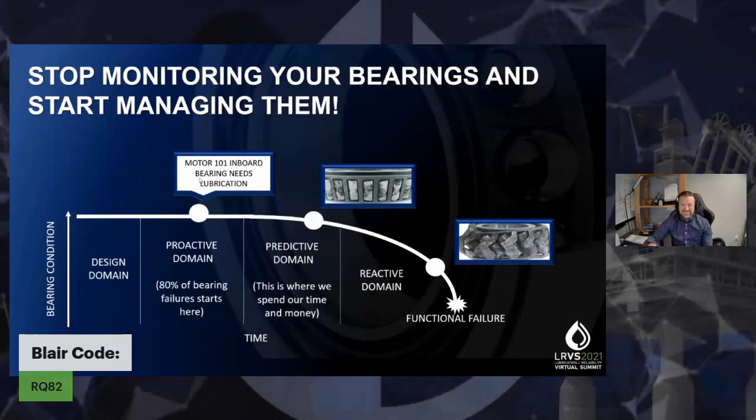What I'm going to talk to you about is re-looking at the way we do re-greasing of bearings and how we can leverage more technology to make that process more efficient. I'm pretty active in the IoT space, and I try to have conversations with people in panel discussions. I fully agree that people are the most important part, and technology can help fuel people to make better informed decisions.

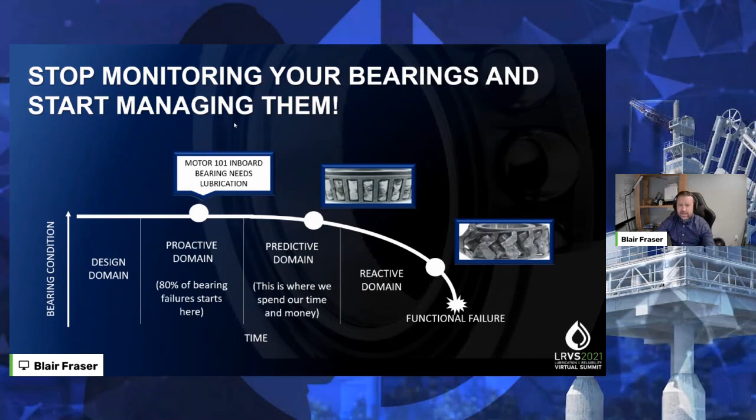What I'm seeing in technology in general is that we're doing a lot of work to identify a failure in a bearing. It's what I call a race to identify the failure. I believe that if we just spend a little more time on the proactive part of eliminating failures, everyone agrees it makes so much sense to eliminate that failure from happening in the first place.

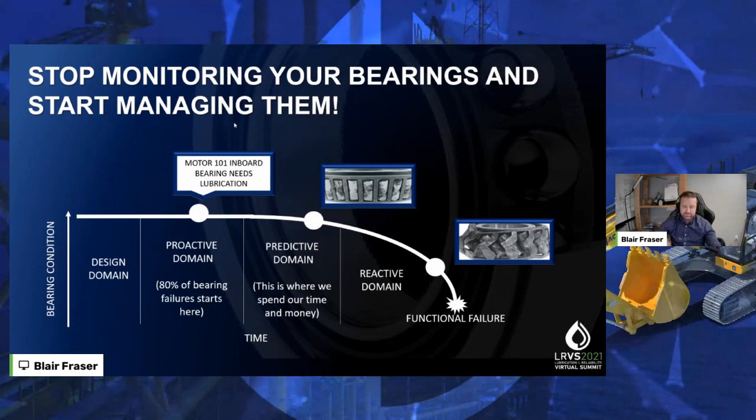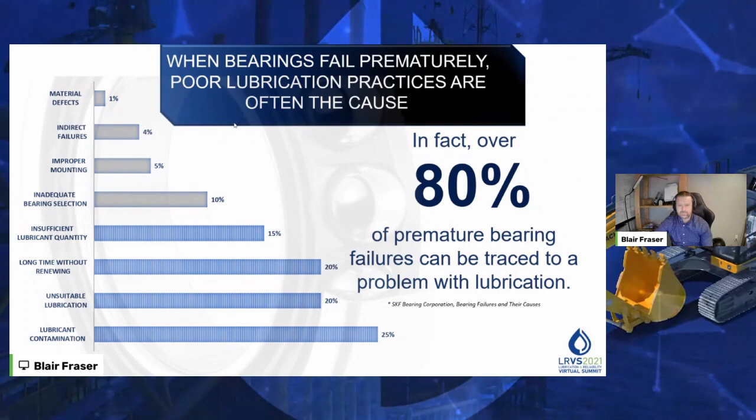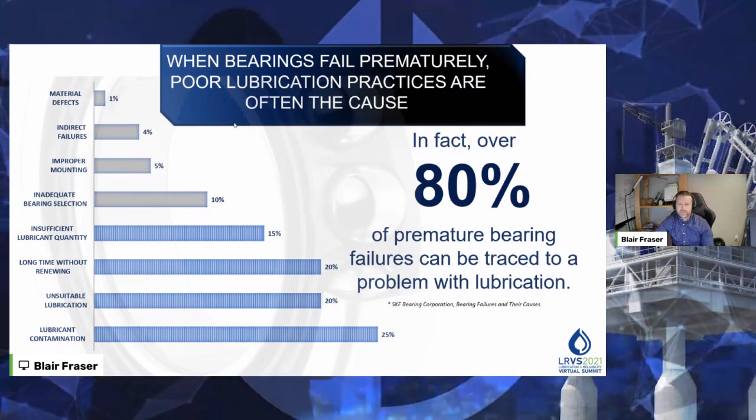There's lots of studies, and it should be no surprise to anyone in this community that, whether it's 80% or 60% depending on the study, the primary cause of premature bearing failure can be traced back to a problem with lubrication. And it's not just over or under lubrication, and it's not just contamination, there are other aspects to that. So when we're looking at reimagining bearing lubrication, the question is how do we address and try to eliminate the causes that can be traced back to a problem with lubrication.

And I think that's really where technology can start to come in. Those repetitive non-value-added tasks are what we need to focus technology on, and really focus the humans, the people, on enabling those value-added tasks.

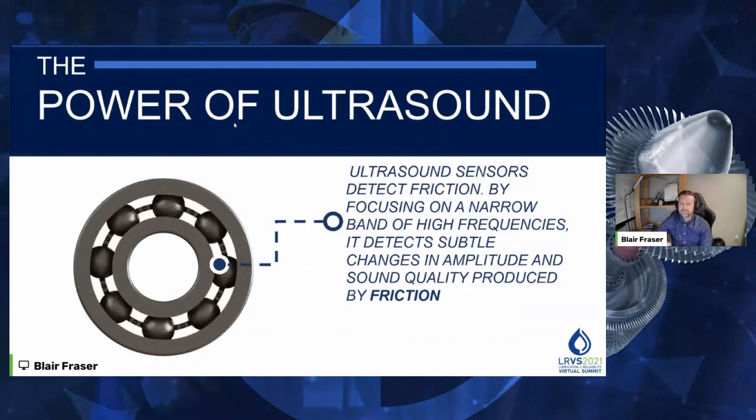So some of you might be familiar with ultrasound, and I'll give you a quick overview of what ultrasound is. Essentially, we're measuring high frequency noise, way higher than we can hear with our ears, and essentially what it correlates to is the sound produced by friction, the friction happening in a bearing. So then it becomes kind of obvious why ultrasound might be a really good fit for you in your condition monitoring program to look at the health and lubrication needs of your bearings.

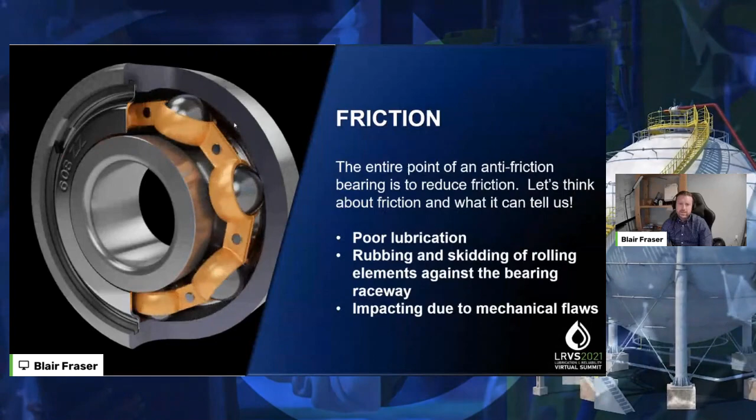So when we look at friction as a whole, it can tell us a lot, and we start to focus on things about condition monitoring, condition-based maintenance, whatever you want to call it, predictive maintenance, although it's not typically too predictive at all. But if I use the word condition-based maintenance or condition-based monitoring, what's the condition of the bearing we're trying to monitor? What's that one variable? Friction can tell us a lot if we track it properly. It can tell us about poor lubrication.

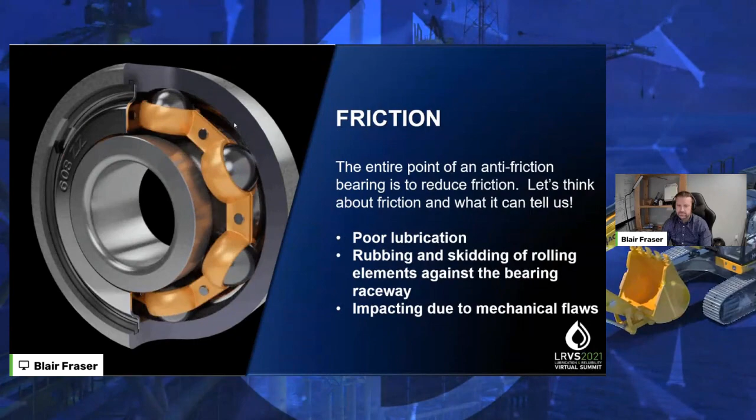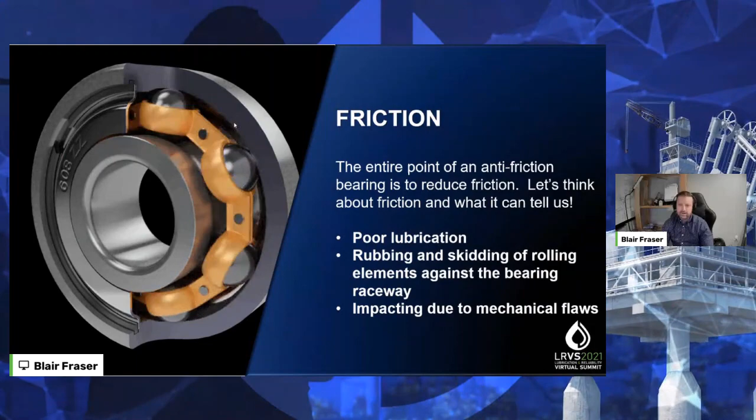The purpose of lubrication, of grease in a rolling element bearing, is reduce friction - that's the primary function, among other things like corrosion protection. In fact, it's in the name: a rolling element bearing is an anti-friction bearing. It can also tell us if it's impacting and things like that.

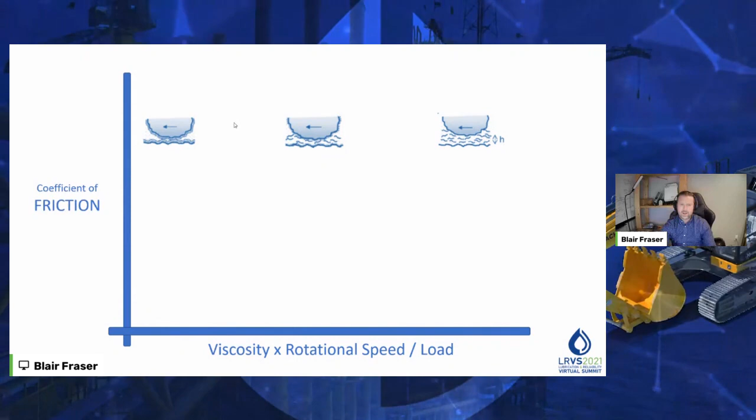So when we look at this as a whole - and some of you might be familiar with this, and do a lot better justice than I'll do - we look at what's called the Stribeck curve. And for any tribologists who want to add comments, feel free. When we look at friction compared to viscosity times rotation speed over load, essentially the operating context of that bearing, the first regime they talk about is boundary.

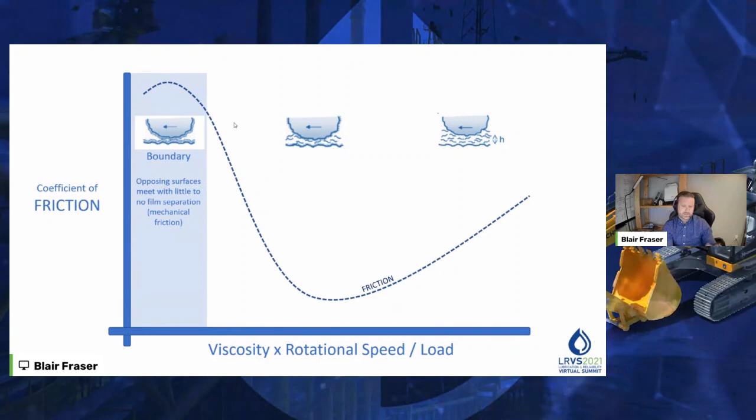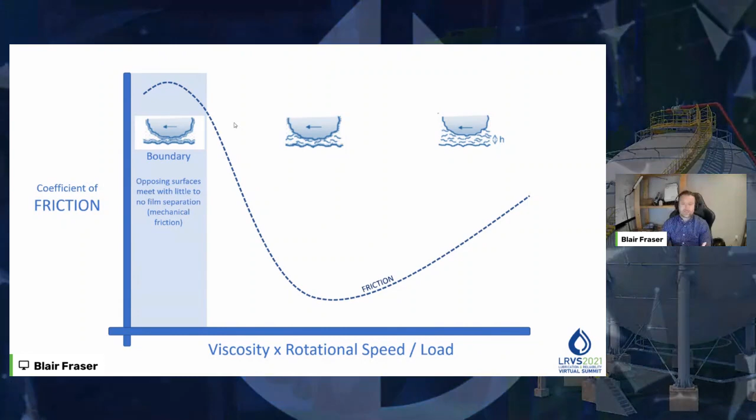When you have essentially no film separation, there's metal to metal contact, right? And obviously metal to metal contact is going to give us the highest level of friction, or in our world of ultrasound, the highest level of decibels.

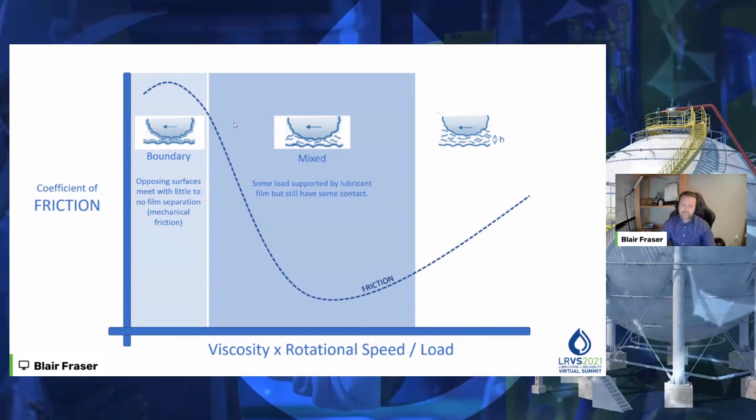We get into the next category, which is the mixed regime, and this is ideally where we want to be. Some load is supported by the lubricant film, but still have some contact - that very thin film. I've heard so many grease specialists tell me the exact number, and I always forget how many microns thick that grease needs to be, given it's the right grease, contaminant free, to actually support that ideal level.

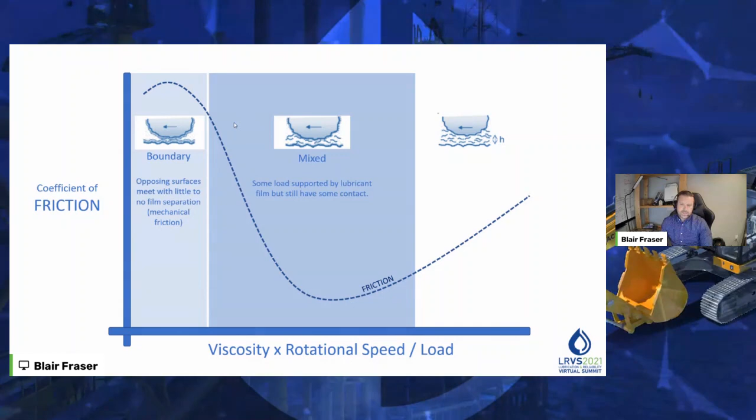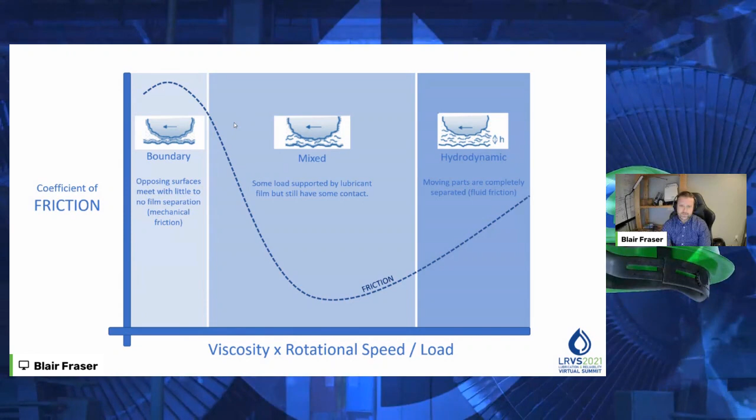And then if we move out of that, we get into the hydrodynamic, which is almost counterintuitive in my world - I come from the electrical space - was hydrodynamic, when there's actually so much grease in there we have opposing directions of fluid. We've all seen that when we've greased a bearing too much - what starts to happen? The friction starts to increase, it starts to heat up and things like that.

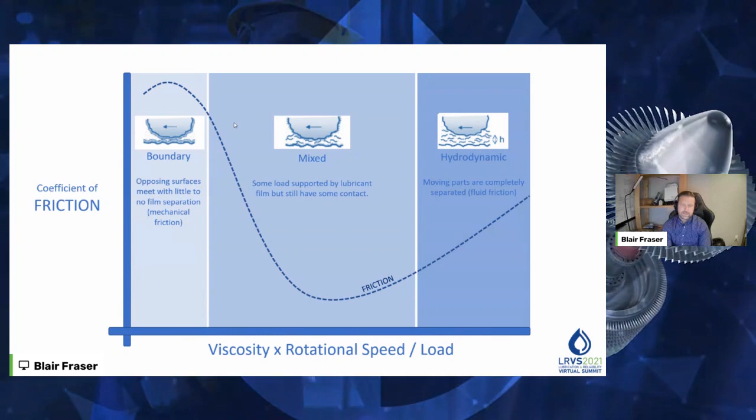So knowing where you are on the Stribeck curve can greatly impact the life of that bearing. But typically we don't look at it this way, right? We look at other means of measuring that bearing in terms of velocity, movement, and things like that.

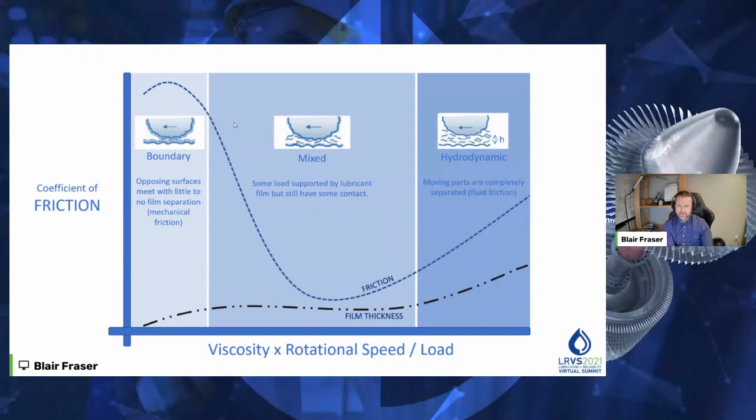So when we look at that film thickness, there is an ideal location. In fact, what I've learned is that you don't want to be at that bottom of the curve, the lowest point of friction, because it doesn't leave much room for error. In fact, where I have that word friction is ideally where you want to be on this Stribeck curve.

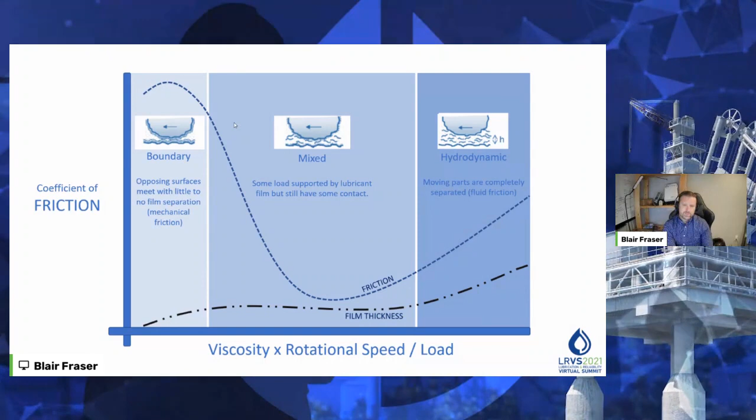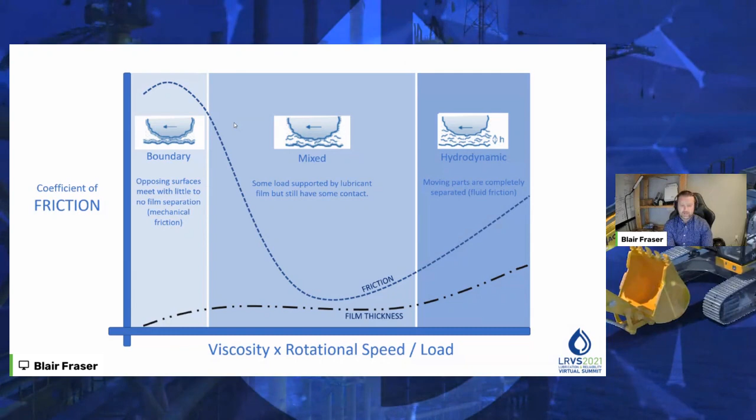You want to be in between - you still want to be in the mixed regime, as they call it, but you don't want to go back toward the boundary of mechanical contact, because that's where a lot of damage occurs. So knowing where you are in the Stribeck curve can truly reimagine how you look at bearing lubrication.

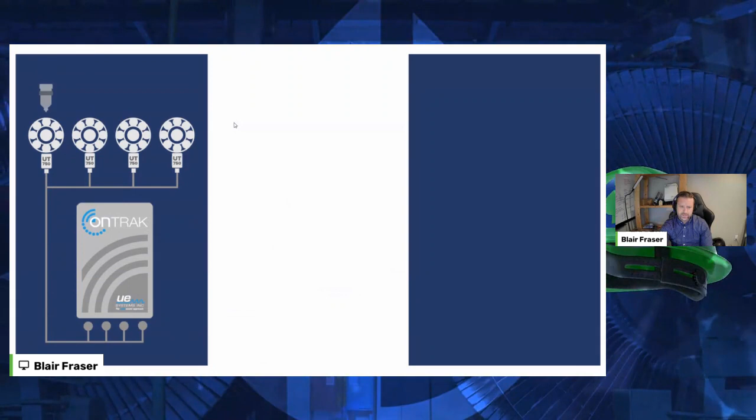So what we developed was a system that, through our sensors and ultrasound, is going to measure that friction in real time. So consider it, you're building a trend of that Stribeck curve of what's the friction over that bearing in real time, and that information is getting sent out.

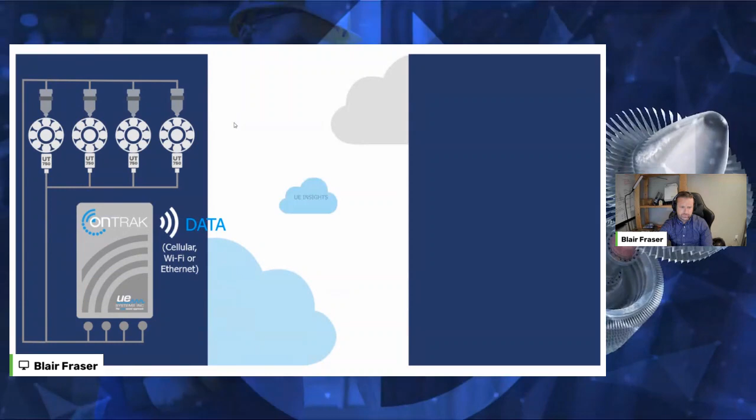And this is about reinventing or re-looking at those non-value added tasks. So you're measuring that friction 24/7 through all operating contexts - when it's off, when it's on, variable speed, different temperatures, all that kind of stuff - to get insights into that friction.

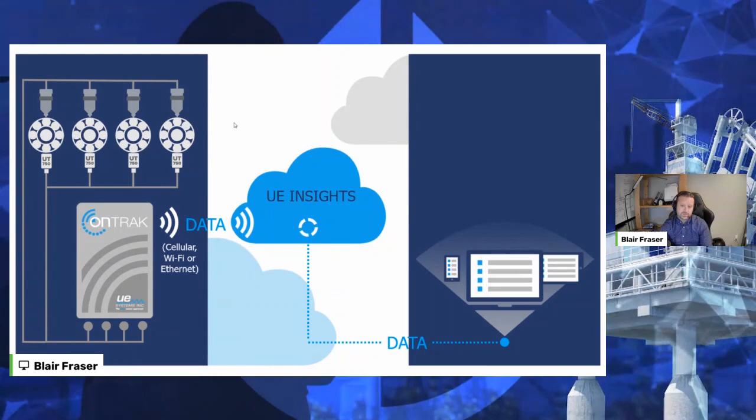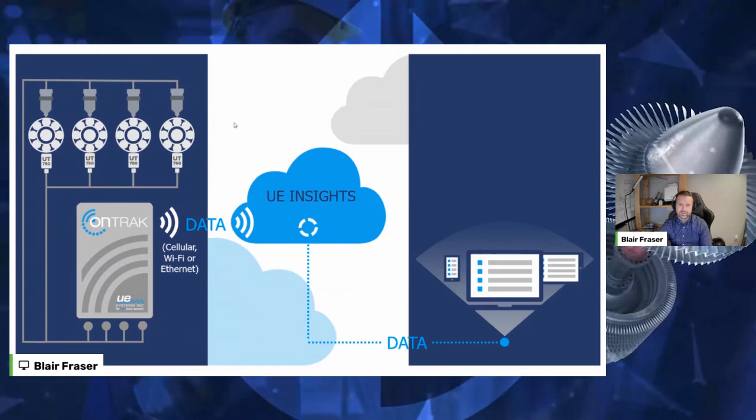And what we can start to do is look at that friction and start to identify certain insights. Those insights traditionally are: when does a bearing require lubrication based on friction, how much lubrication is required based on friction, and then if I enter a failure mode beyond friction, how quickly am I starting to fail? Those questions can be answered by trending this friction in real time.

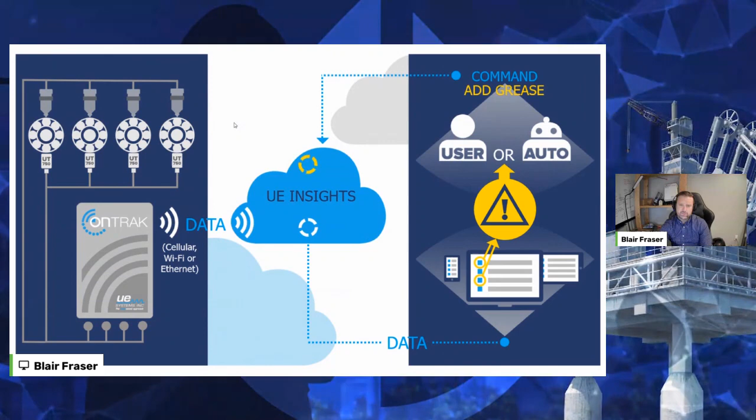So what we allow is the user, in fully automatic mode, to go out there and, using friction as its guide, know exactly where it is on that Stribeck curve, and very strategically and very slowly add the right grease to that bearing to restore the friction level, right? We have case examples.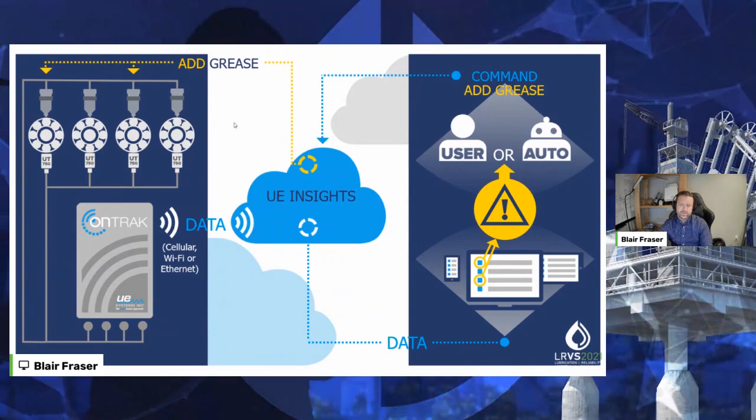I'm going to show you what that data looks like when we're in that far left boundary of the Stribeck curve, when we have metal contact, and see what happens with just a little bit of grease hitting that bearing. And then, of course, if we have over-greasing, what happens with that as well?

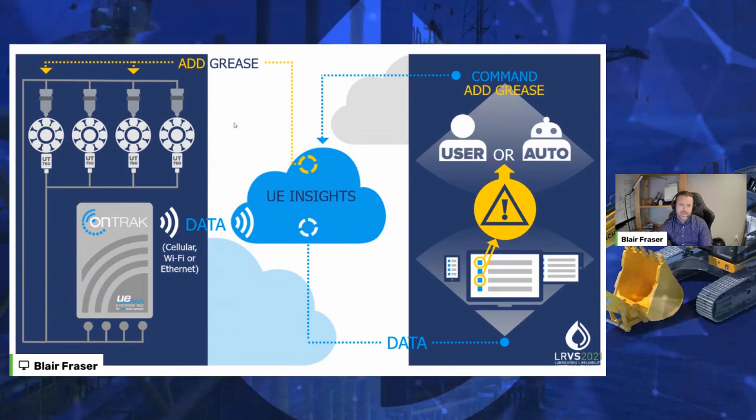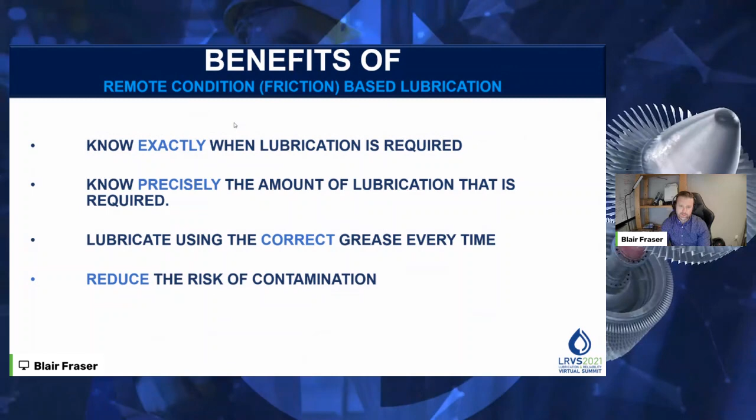So the benefits of remote condition, friction-based lubrication is the feedback. We know exactly when lubrication is required and precisely how much is required. If we do this right and load the single point lubricators, which traditionally have no feedback and no status of how much grease is left, we know with confidence we're using the correct grease every time, that grease is hitting the bearing, and that remote grease lines aren't plugged. And of course, we reduce the risk of contamination because we're not walking up to it on a time-based schedule.

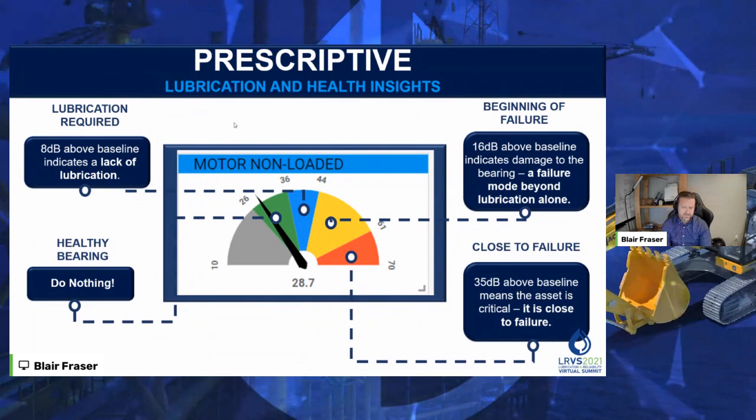The way we look at it from a friction or ultrasound point of view is very simplistic. I know there's a lot of talk, and I'm a big supporter of artificial intelligence and machine learning, but it's very important to only apply it when it can drive additional insights.

One thing we talk about with ultrasound is its simplicity. It's not simple in how it gets the data, but it's very simple in how you can start to use the data. And what we do is set up a traditional dashboard like this.

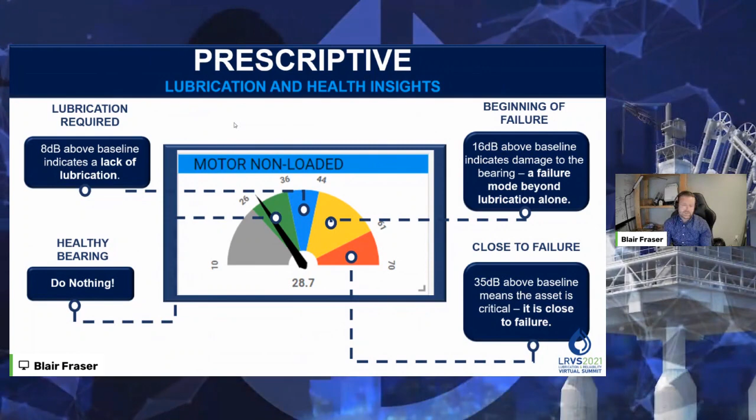What we do is set a baseline. It's very common to use an 8 decibel level over baseline, which is an ISO standard regardless of the bearing. I can go into more detail, or we can chat separately about how to set that baseline, because each bearing and application will have somewhat of a different baseline. So if there's an increase of friction 8 decibels above the baseline of a healthy, well-lubricated bearing, it needs lubrication.

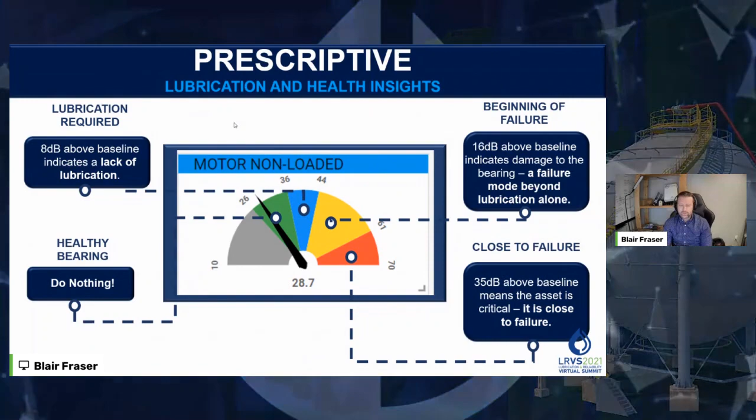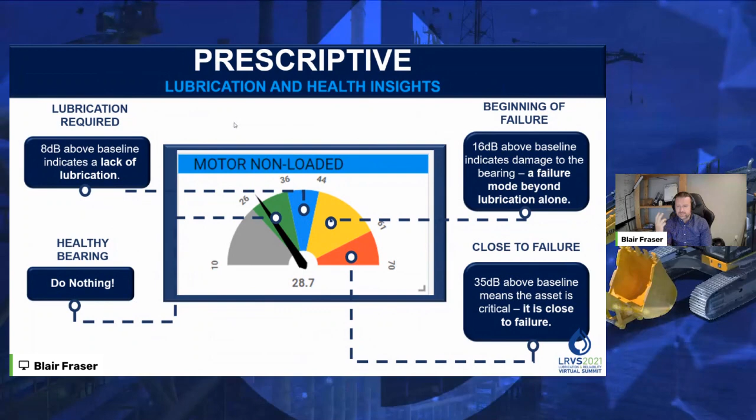If it's 16 decibels above, we're going beyond a lubrication failure mode, which I'll show you some examples of. When you lubricate, you can mask a failure with grease - we actually see that friction go down, but it's not going to stay down. Think about an inner race defect, an outer race defect, a cage failure - eventually that defect is going to find its way through, and you will start to see that friction go up. I have some use cases of that.

And if it's 35 decibels, that machine's walking down the hallway, and you're going to pick it up with other senses and things like that.

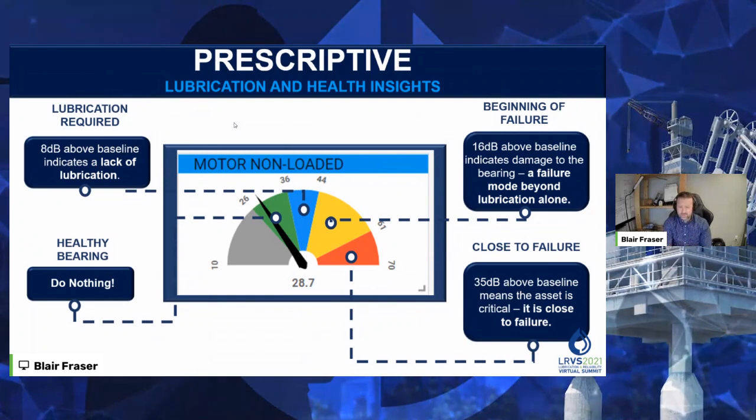So I want you to imagine with me, right now we're reading 28.7 decibels on this screenshot I took. Imagine that arrow was straight up, reading 40 decibels. You walked up with a grease gun, using your cell phone, watching that friction. You squeeze a little bit of grease into that bearing. What's going to happen is, with every squeeze of that grease gun, you're going to start to see the friction start to go down, in real time.

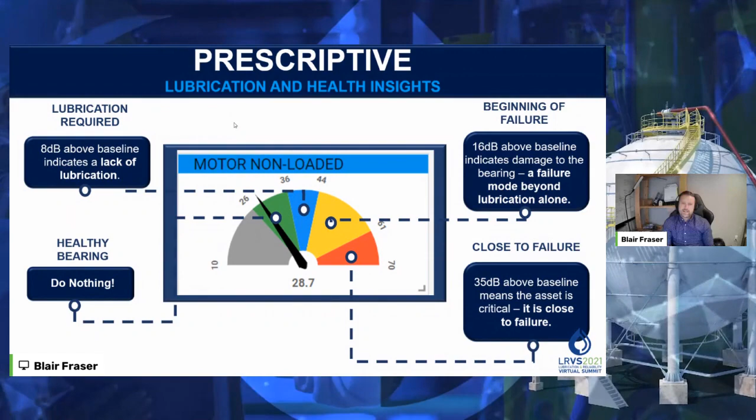And that's really what we've got to think about from reimagining it - we're not just doing it on a time-based schedule, we're doing it on condition feedback. And if we take it a step further, what if you didn't have to squeeze that grease gun? What if it could do it for you?

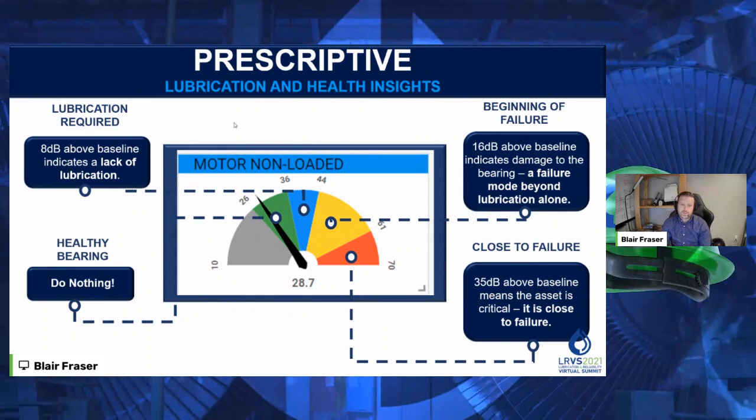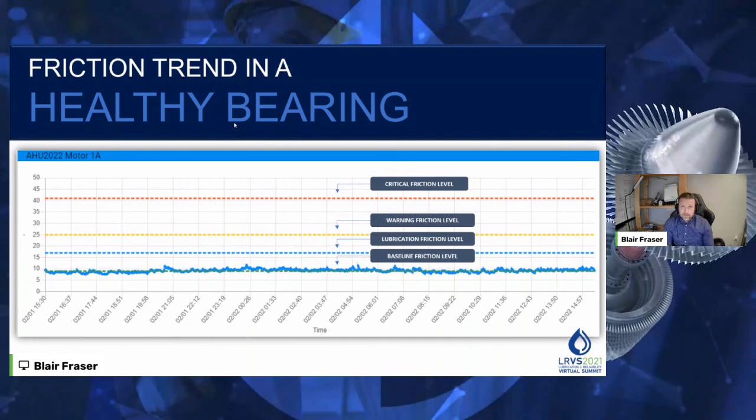So the question is, does load, operational context, or speed change friction? Yes, it does, and let me describe what it does on a healthy, well-lubricated bearing. This is another way of visualizing this - you can see this friction trend if you were to plot 24 hours, 3 days, 3 years, or however much time you want.

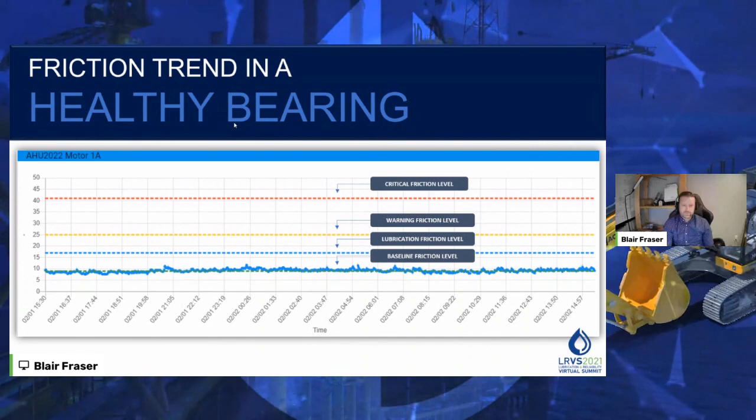This is ideally what you want to see. There's a green line underneath there - that is our baseline. That blue dotted line is the lubrication level. When it needs lubrication, our blue trend line of friction will actually increase. Over top of that blue line, we lubricate.

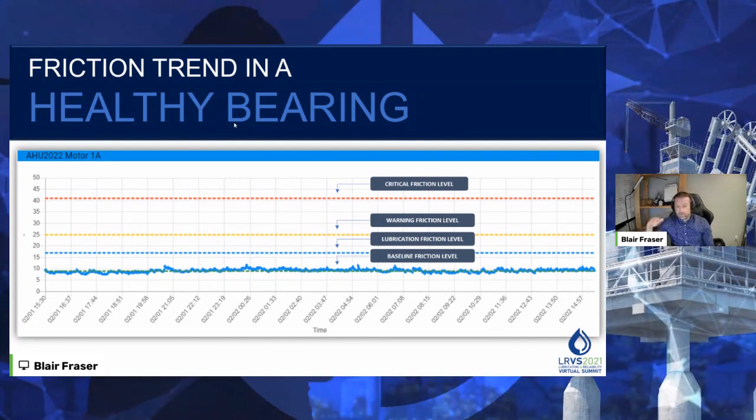It comes back down again. Of course, yellow is warning, and red is critical.

So let me answer the question: does friction change based on varying speed conditions? It does, absolutely. We've done our own studies, academia has done studies, and our customers have done studies. It's important to note that on a healthy, well-lubricated bearing, the change is very subtle. We may see a slight increase, maybe 2 to 3 decibels. Sometimes it's larger, depending on the operational context, but it's not going to be a night and day difference.

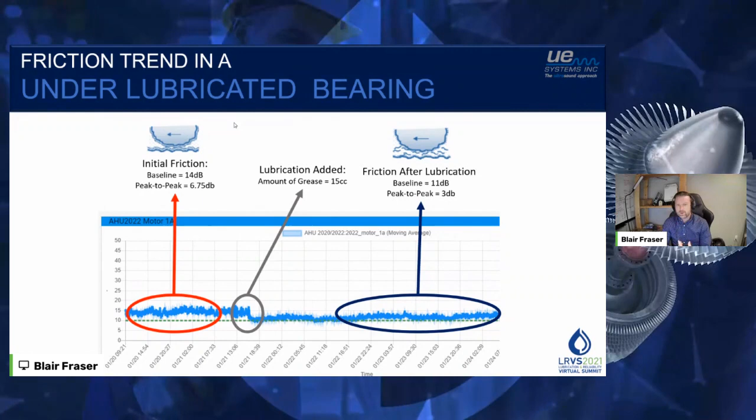So let's take a look at this. Here's an example. You can see the initial friction. The baseline was 14 decibels peak to peak, that's the highest point to the lowest point of the friction trend. Essentially that tells me there's a lot of impacting going on. We see this very commonly with the system because it becomes so easy to maintain your bearings, people will grease even when it's not at the point where you absolutely need to. They just want to watch that friction go, which is fine.

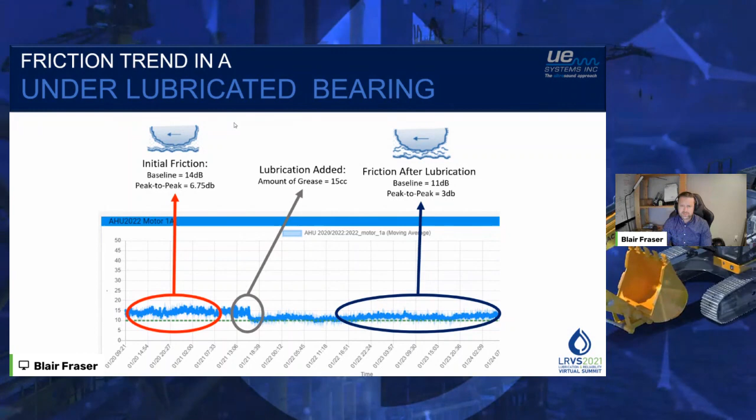So what happened here is 15 cc's of grease was added. You can imagine if you were listening to this, which you can with our ultrasound tools, our handheld tools, you're going to hear a lot of static, a lot of impacting. As soon as that grease is added, nice and quiet. So it dropped down by 3 decibels, peak to peak almost reduced by half. This is what looking at friction can do for you. And if you know what 15 cc's of grease is, it's not that much.

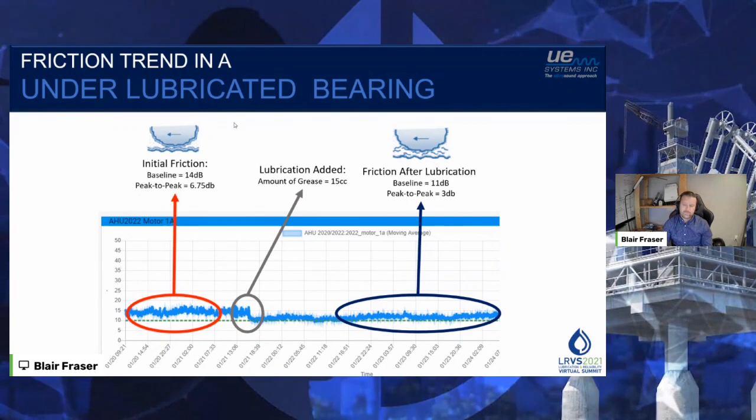So here's an example where we got into that boundary, mechanical to mechanical contact. What the system was able to do is say this bearing needs lubrication. It went out there and lubricated it. You can see exactly, it was 9 cc's. We're talking such a small amount of grease was used to restore this friction.

What we found, and it was interesting to me, is what we found to maintain that ideal spot on the Stribeck curve is the system will grease more frequently than the time-based calculations, but use a lot less grease. Cumulatively over the life of the bearing, you use a lot less grease even though you're greasing more often. Again, 9 cc's is just a thimble full of grease, typically a rounding error in a grease gun.

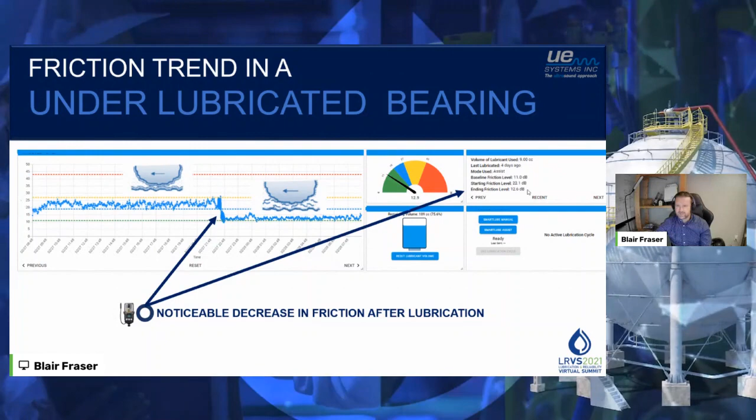And what it says here, so this was 4 days ago at the time I took the screenshot, assisted mode, so it did all the work for them, but it recorded the baseline friction was 11, starting friction was 22, ending friction was 12.6. So it got it right close to baseline automatically. That's what we're talking about, reinventing or reimagining how we lubricate our bearings.

Now, this wasn't the SmartLube, this was just going out there with the grease gun, but you can see the impact of just a small shot of grease. This is what we call the aha moment. You're trending that friction and go, just how much grease? I'm like, just put one squeeze in and see what happens to that friction. And we start to see examples like this.

So we move from that boundary to that mixed domain or regime. Now, this is an example where the friction level wasn't high, but as you can see by the squiggly friction line, it was impacting. In my opinion, it's not going to cause a lot of secondary damage to the bearing. We would start to see that as it picked up in friction.

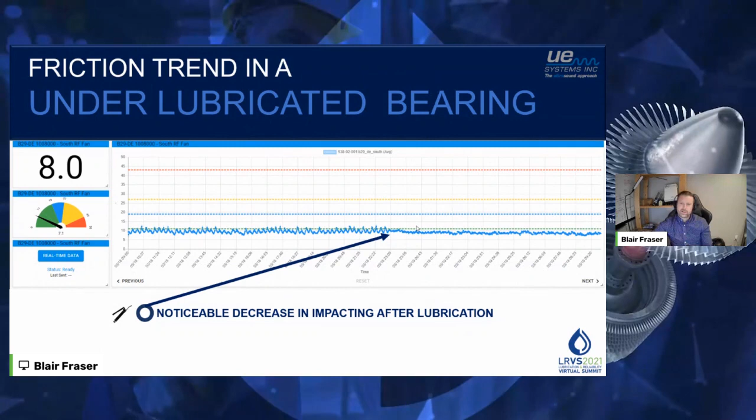But what the customer wanted to do in this case was go in there and just put a little bit of grease in, again a small amount. And what happened is, you can picture it, the impacting, a lot of noise. As soon as that grease hit, nice and quiet. And that friction actually dropped below baseline, which is absolutely perfect. So trending that friction becomes very obvious when a bearing needs lubrication.

So here's another example. And I'm always, the first time that we do this, and we can do this remotely, I've lubricated bearings all over the world now through these systems because we can do it through our phone.

If a customer gives us access, we can do it with them, and I always like to do the first couple with them. I always call it the aha moment, because they're watching that friction. The system tells you it's putting in this much grease, and it waits, because the grease typically comes on top of a bearing and has to get pushed all around, turned all around to get all through.

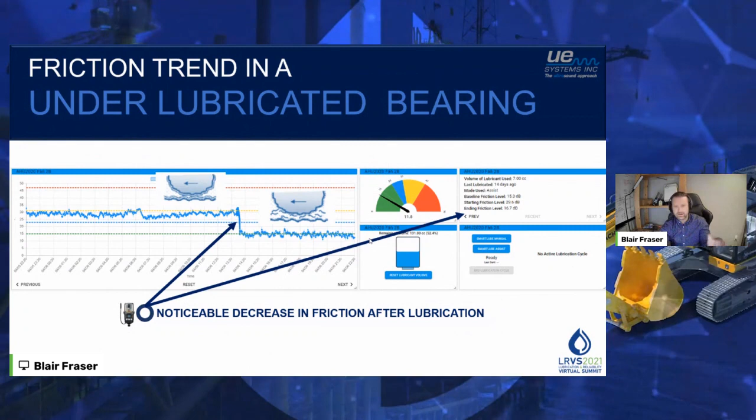It's a little bit different if you need to purge out old grease — I can go into that offline about how you'd purge old grease from a bearing first. But we call this the aha moment.

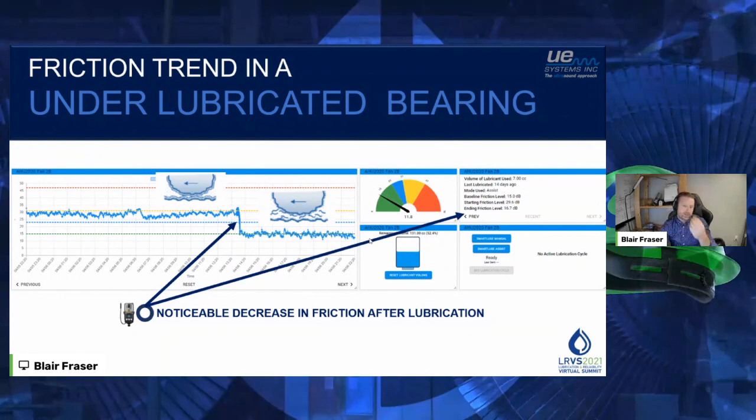The rate at which that friction starts to drop once grease gets in — it may not happen at the first half cc or a third of a cc, but once it starts to reach and push its way around, it drops.

This is a great story, because I have kids, and I love this — I don't encourage anyone to go do this while you're with your kids, invest in family time. But one of our customers told us they got the alert that a bearing requires lubrication, and he wanted it set up so he'd go give it permission to lubricate rather than have it do it on its own, which is their choice. He said, okay, give it permission to go ahead and lubricate.

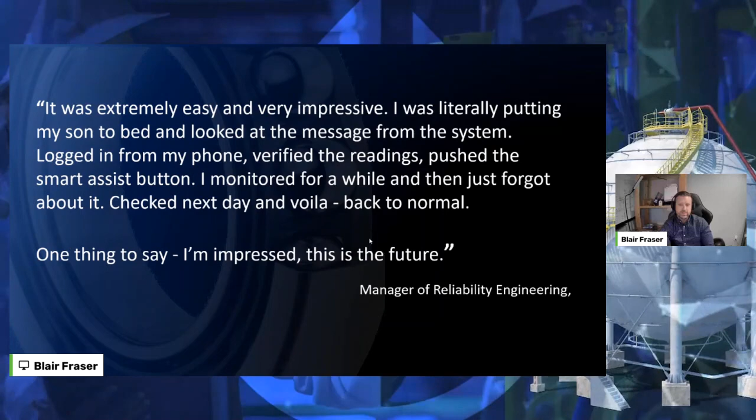It went through its steps. It may take 30 to 40 minutes to lubricate that bearing — a simple, small rolling element bearing may take 30 or 40 minutes because it's going to do it very slowly and very systematically.

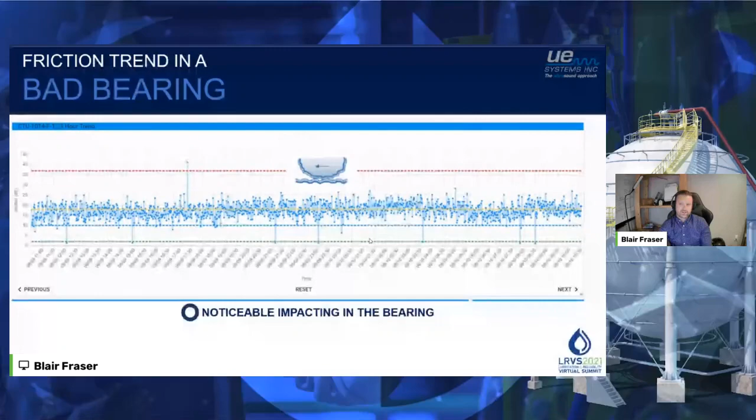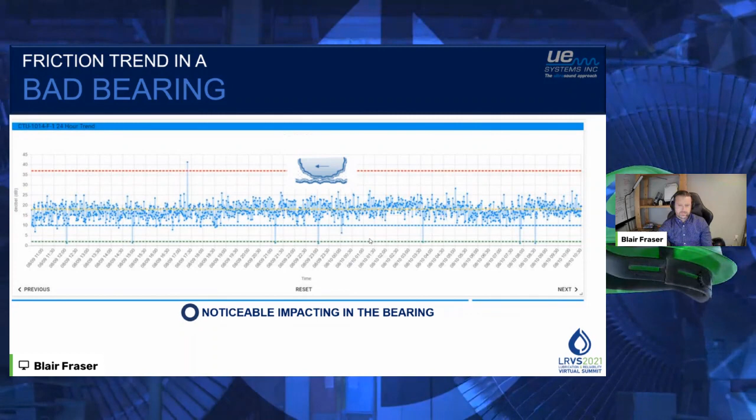Now, when we look at trending friction in a bad bearing — and I've shown you those nice marketing pictures of smooth lines, grease hitting it and it dropping — the reality is not all bearings are like that. I'm sure many of you, if you're an asset owner, have some bearings in question. So even without knowing ultrasound, just with the information I gave you, look at this trend line compared to those other trend lines. You would not want this type of noise, this type of friction and impacting in your bearing. This is close to the extreme of metal-to-metal contact.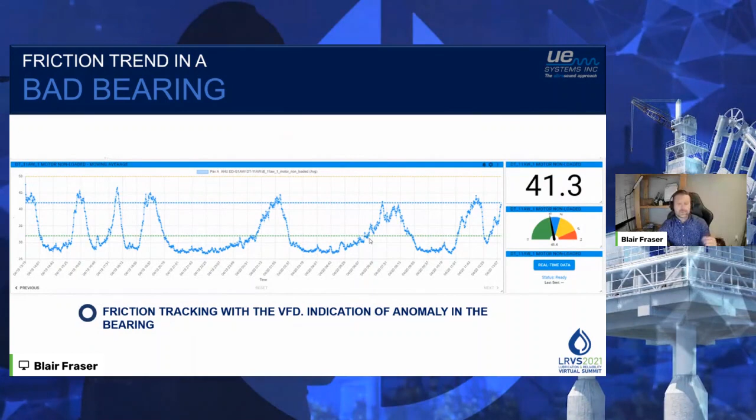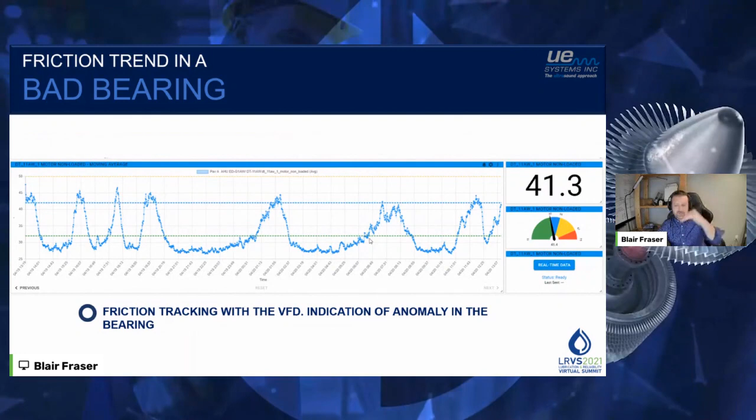And then I mentioned tracking that friction with the VFD in a healthy, well-lubricated bearing — I showed you that with the air handler unit, it doesn't fluctuate very much, though we do see some peaks and valleys. Look at the size of the waves here, and if you were to track the speed, it matches that friction trend. This is an unhealthy bearing. Again, you don't need to be an expert to look at this — you should not see a trend like this in that bearing.

So here's an example — again, not just sharing ideal use cases, but showing what's possible. We see that increase in friction. In this case, it went above the warning level and was lubricated remotely. The friction dropped, and the system tried to get it down to baseline.

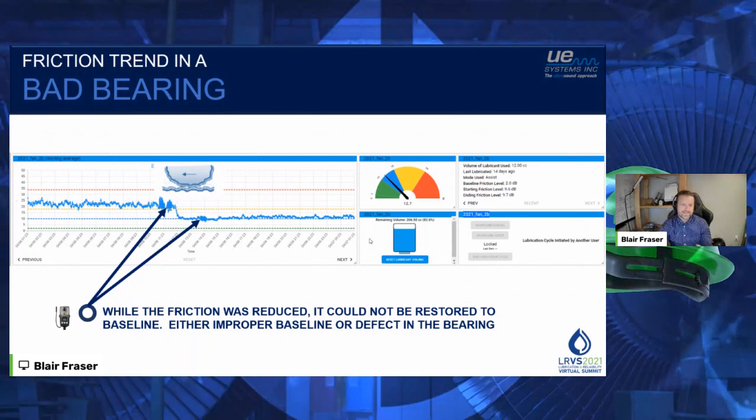What the system will do is keep putting lubricant or grease in, but there are two stop points. One is it will never exceed the max bearing capacity — it calculates that, and you put that in as a variable, so it won't keep trying to put it in until it explodes the seals or overfills it.

The more important stop point is it's always watching that friction. So if we start going into that Stribeck curve and I'm still adding grease, moving too far to the right where I start to see too much lubrication, it'll actually stop automatically and say, listen — I got the friction as low as I could, but then it started going up, which is an indication of overgreasing.

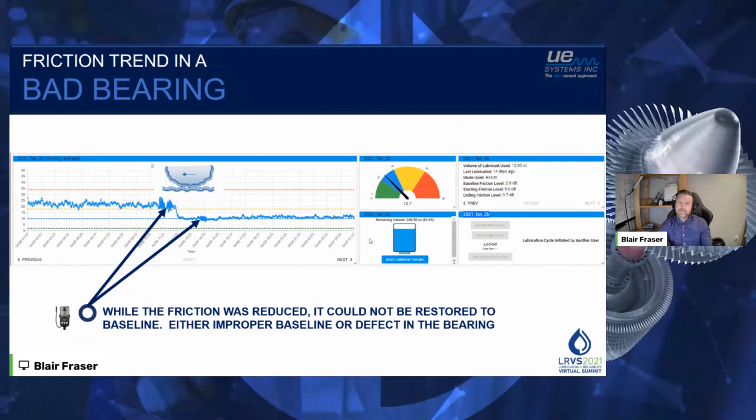In this case, there was a known defect in this bearing that lubrication could not overcome, so the system made sure it didn't over-lubricate it.

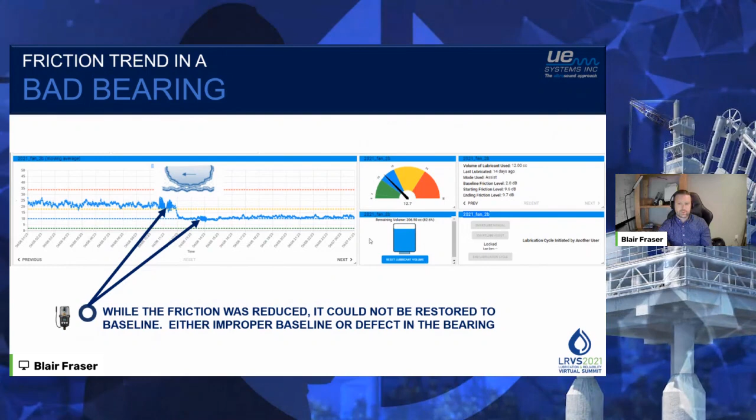Now here's another one — this looks like a successful lubrication. 4.5 cc's, very little used. You can see there's 88% grease remaining in the single point lubricator, and this can be anywhere in the world.

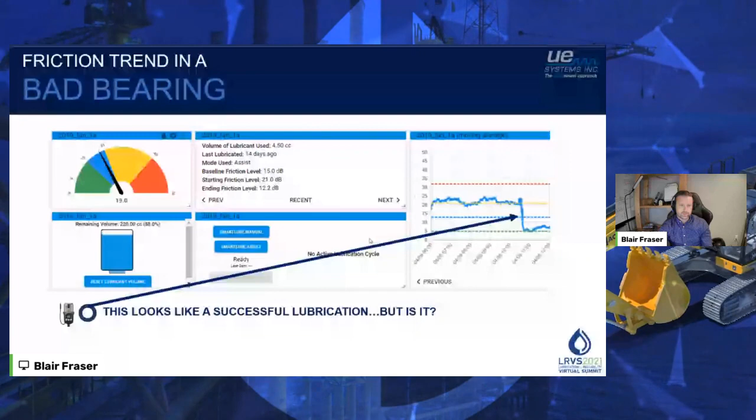It looks like it restored that friction to drop like a stone, but did it? This is the example I get - you can mask a bearing failure by reducing friction with grease, but only temporarily. It will come back.

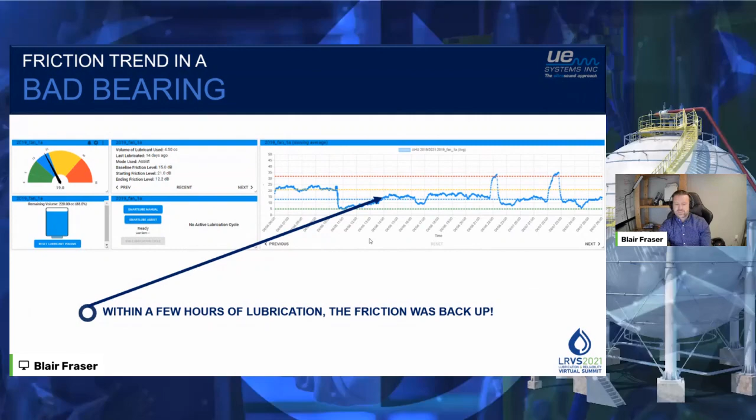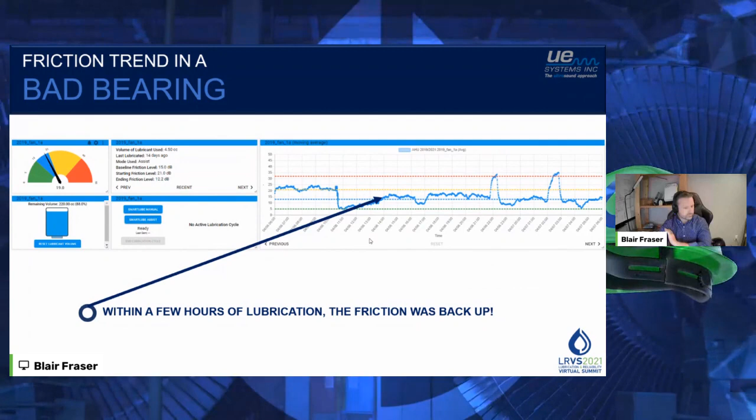You can see here that was at 11 o'clock. By 2 o'clock, so 2 to 3 hours later, that friction was right back up again. So while greasing can be used as a mitigation strategy to nurse yourself through failure - in fact, we have a manual mode where you can hit that button and it will grease regardless of all stop points if you want to - and we've seen customers use that to nurse their way through failure to get to that planned shutdown.

But not everything is perfect. Not everything will have the scenario where the friction drops. And what I want to do, as we're closing up here, is leave you with this example.

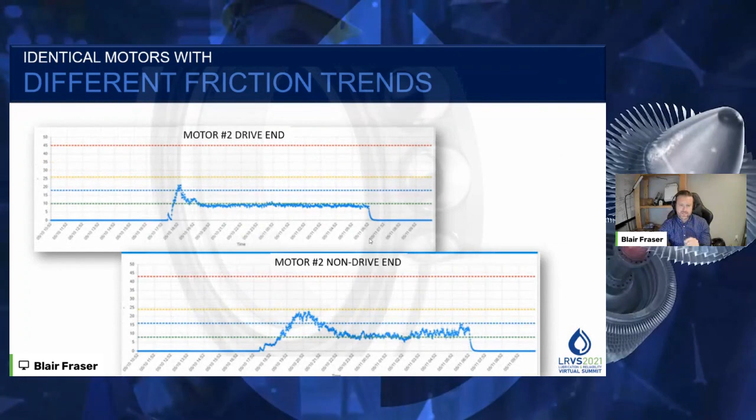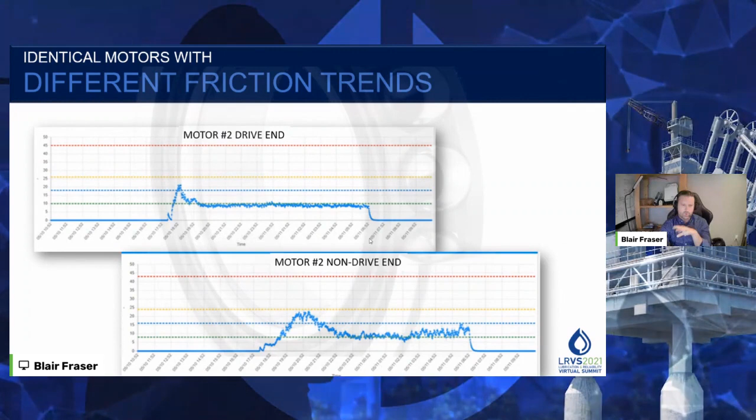Two identical motors on the exact same system running in parallel. They start and stop. This is the friction trend on the drive end and the non-drive end - perfectly gets up to baseline. The next one, look at the friction trend when starting up: it goes high, and eventually within a couple hours finds its happy spot. What we found through investigation is that the equipment had to be off for longer than 2 hours for this situation to happen.

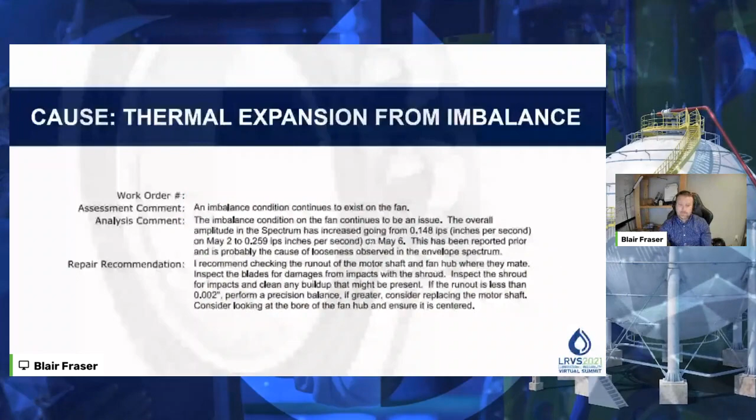Looking at it, it's starting up, doing something, and finding its happy spot in friction. The customer said, exactly, that's what I wanted to see. I asked, you knew there was a problem? He says, absolutely - and they were able to confirm it with vibration, which is a great technology to confirm the root cause or what that defect is.

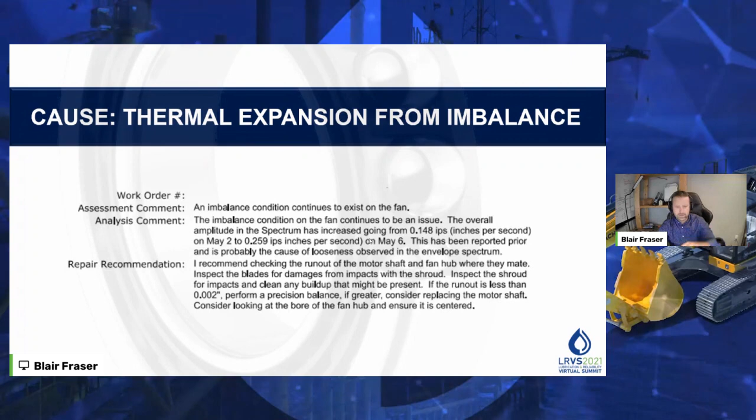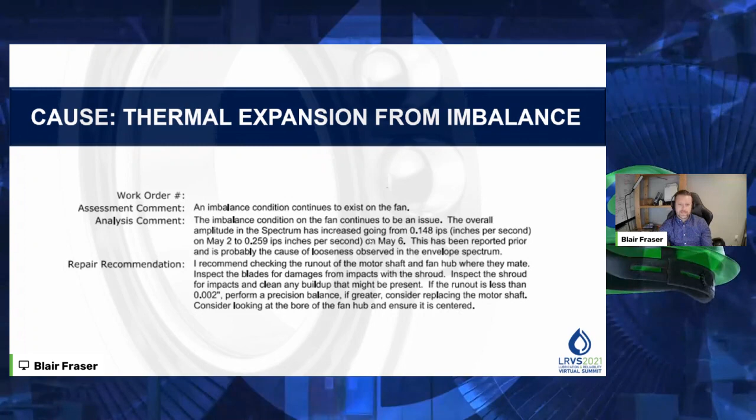And what they found was an imbalance. So essentially, through the imbalance, it had to heat up to find its quote-unquote happy place - the friction was reduced once everything heated up. I'm up in Canada, things get pretty cold here in the winter, and things don't like to sit cold, so it took a while to heat up. But just looking at that from a friction level became very obvious - we shouldn't see those spikes when things start up.